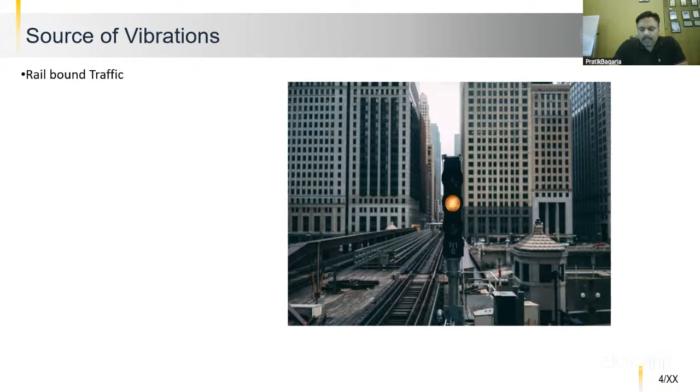So different sources of vibrations could be many, which can give any kind of trouble to buildings. Rail is a major source of vibration. I don't know how much of an impact it is in Sri Lanka particularly, but rail traffic is a big concern in many countries. We know that the metro lines, and there have been so many news articles about all of these issues, where buildings develop cracks and other issues happen to the regular life cycle of the building when there is a metro going close by.

So metro is really a troublesome thing when it comes to buildings, if the building is close by to the metro. Road traffic is also an issue. Again, there are many issues in buildings when the road traffic is very near to the building, and the vibrations can be a concern. The machineries, the giant machineries operating near the building, can be a concern. And earthquake, the elephant in the room - earthquake is always a concern.

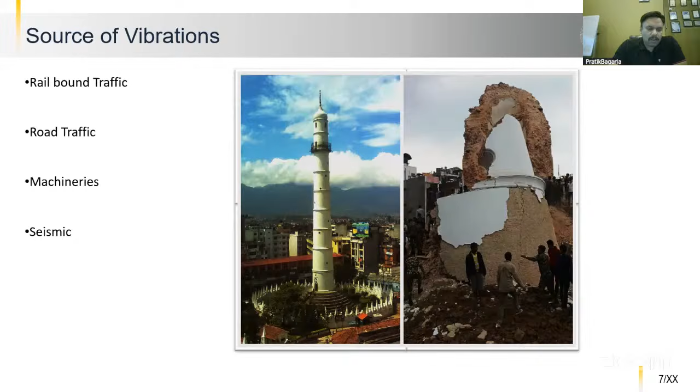You can see this picture which I have taken myself. This is the clock tower in Kathmandu. Earthquake is the major source of vibration for any structure if it is in a high earthquake zone, and we all know it already. Wind can be a very important load case to be studied, and is one of the most detrimental sources of vibration when it comes to tall buildings or long spanning structures.

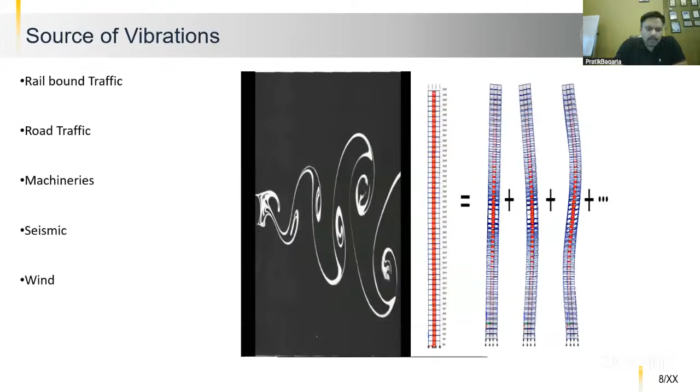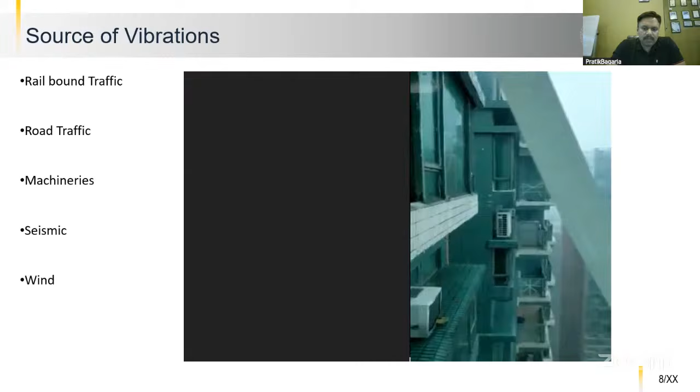There can be many issues in a building. Wind happens to be one of the important things to be studied, along with several others, and buildings can face some detrimental troubles when it comes to wind. Pedestrian traffic can be an issue for some long spanning structures, like an office floor or a bridge. All of this constitutes the different sources of vibrations when it comes to any sort of vulnerability with regards to safety of the building.

What kind of structures do we really need to study for vibrations? Not the regular residential buildings, but at least the residential buildings of some importance really need some assessment. Some big hotels - all the photographs in my presentation are our project photographs, and there can be questions around them later when we conclude. This is Hotel Sheraton in Paris, which is fully isolated by vibration isolation systems. So hotels can be one kind of building needing assessment because they house a lot of people.

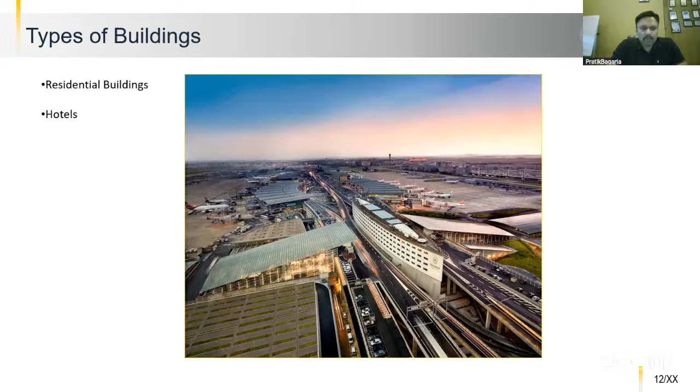Theaters, concert halls, cinemas, office buildings, hospital buildings, modern railway stations, broadcasting stations, data centers, semiconductor facilities, discotheques, or whatever - any facility or building of some importance needs some assessment, and all these different sources of vibrations we just saw need to be studied, particularly for these important buildings.

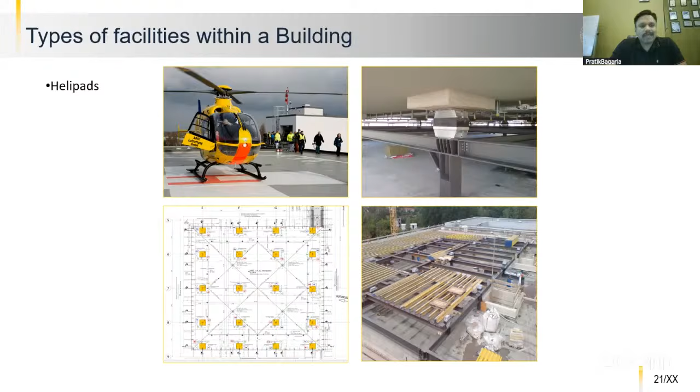There is one more structural element which needs assessment - some facilities in a building which create vibration and disturb other parts of the building. For example, helipads in buildings, swimming pools, auditoriums, banquet halls, gyms, recording studios, dance floors, acoustic rooms, data center labs, clean rooms, and biotechnological rooms inside high-end data centers and semiconductor facilities. All of these facilities are also very vulnerable to vibrations or create vibrations themselves and disturb other portions of the building.

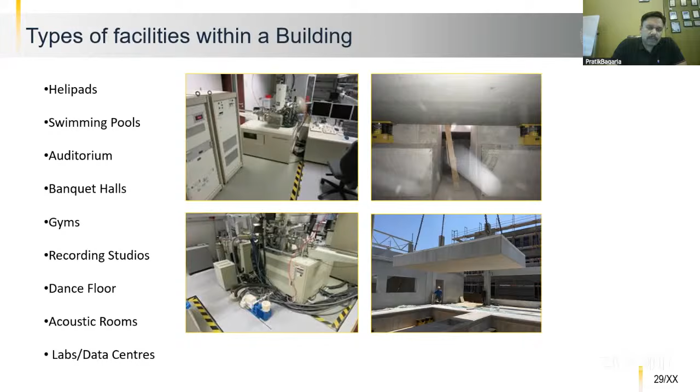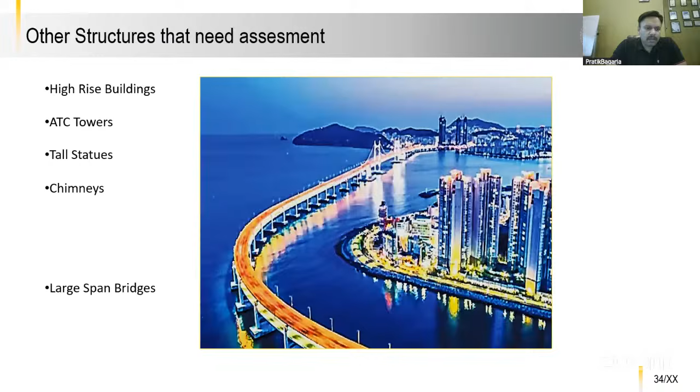These are the different facilities which need assessment within a building. Some other kinds of structures also need assessment - if it is a high-rise building, like the Dubai Frame where we put tuned mass dampers, or air traffic control towers, tall statues, plant chimneys, large and long spanning bridges, large cantilevers, and stadiums. All of these non-regular structures need assessment when it comes to study of vibrations and earthquakes.

Now coming to the main topic - what is the solution for all of this? We already noticed what different sources of vibrations can disturb, and what different kinds of buildings and structures are affected. But what are the different solutions? The first solution that comes to the mind of a structural engineer is to change the shape of the building. He talks to the architect, but more often than not, it will not be allowed and it will not happen that you completely change the building itself.

Then the structural engineer decides to increase structural stiffness by adding more and more mass, going the old conventional way, going back to the 1500s and 1600s, where you just dump mass and make the structure heavy. That's also not possible in most cases these days because of several reasons, which you already know. So what do you really do?

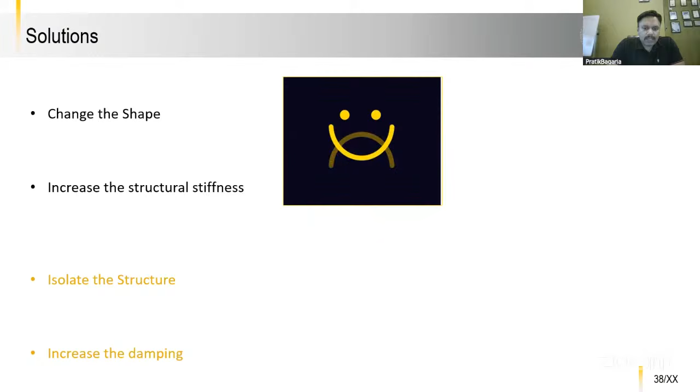Depending upon the class, size, geometry, use category of the building, and many other factors, either you isolate the building or you increase something called damping in the building. Now, to do either of this, to isolate the building or increase damping into the building...

First, you can isolate the building. Again, depending upon size, geometry type, class, importance category, occupancy category, etc., the solution will be decided, but essentially these are the solutions. The building can be isolated at the bottom, or there can be supplementary damping offered in the form of small dampers put along the height of the building.

As you can see, viscous wall dampers is option number two. Or you can put a concentrated damper at the top of the building if it happens to be a high-rise building, to control vibrations due to wind. Also, for helipads and other things, you have something called a floating floor. Or you can isolate the equipment or machines inside the building using the same concept.

So essentially, these are the things we will talk about today: isolating the building at the bottom, increasing the damping of the building throughout its height by introducing small supplementary dampers or viscous wall dampers, putting up a concentrated form of damper called a tuned mass damper at the top, and floating floors. So first we will talk about isolating the building.

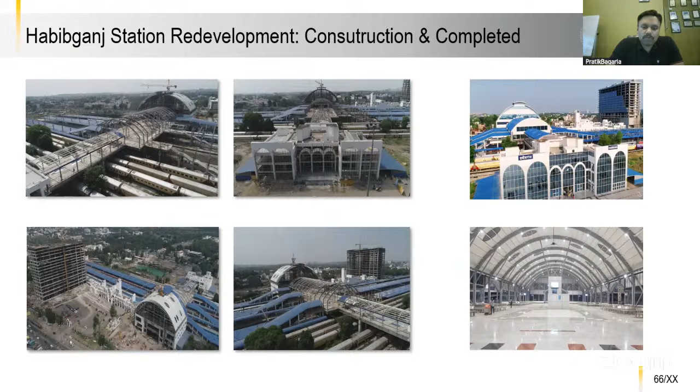It controls all the vibrations that originate from the movement of the train and go into the concourse area. Now these concourses will be used for sleeping pods, restaurants, high-end offices, etc., and you would not want any disturbance inside the concourse area. Now India is also planning to develop residential facilities over the concourse and over the railway stations, where such solutions can really prove very beneficial.

Now we talked about isolating the structure and creating this filter using two technologies. One is base control system and another is closed cell polyurethane. But depending upon, as I said, the type of the building, the use case, etc., you can also increase the damping in the building.

Now, to increase the damping in the building, you can add supplementary dampers. If you don't add a supplementary damper, you know how the seismic response of a conventional building would be - I will not go into that. But if you use a supplementary damper, this is how the seismic response of a building with a supplementary damper would look like. Once the damping of the building is increased, the base shear, displacement, drift just shift it to the corner.

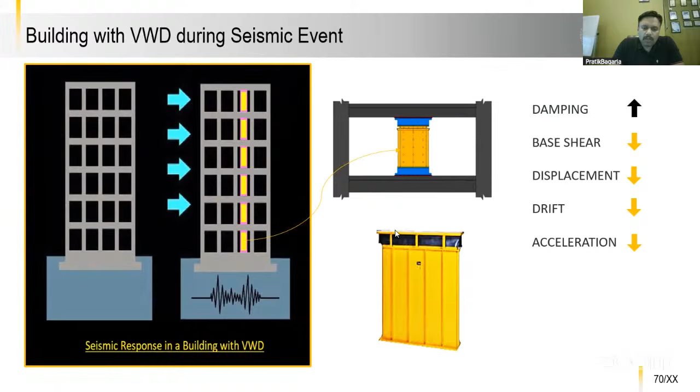Once the damping of the building is increased, the base shear, displacement, drift, acceleration, velocity - all these parameters will come down, simply because you have increased the damping. And this is something very easily correlated and established by different codes - of course Indian code, but so many other codes as well, in Eurocode, in ASCE, or in IEEE, whatever.

Why are you able to reduce the application of earthquake force by 20%? Because you are able to increase the damping from 5% to 10%, which essentially means that the building is now more resilient. The building has now more damping to be able to take into account the earthquake forces. And for that reason, the code allows us to reduce the application of the force itself at the first place.

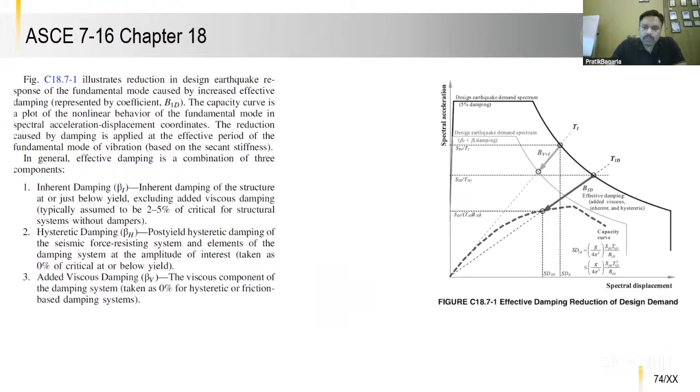These things are very clearly mentioned in all different kinds of global books or codes, whether it is ASCE or California Building Code or the UBC or the Eurocode, etc. So in FEMA also. And there are enough research papers from our office and from several other places on this particular subject.

Now, what essentially does this viscous wall damper look like, or what exactly is the viscous wall damper? If I go back, for base control system, it was a spring system with a pot damper on the side of the spring system, creating a filter for the vibration not to go inside the building. Here, the viscous wall damper acts like a resilient system which is added to the building, offering extra damping into the building.

It is a very sleek, maybe 60, 70, 80 mm thick tank. It has a bottom body, a bottom tank, as you can see in the picture, and a top plate called piston, which goes inside the tank. The black portion of the image on the right is the piston which goes inside the tank, and the tank has something called viscous mass. Now, when there is an earthquake event, the earthquake force that goes into the building gets consumed in moving the piston inside the tank, inside the damper. And since there is viscous mass, the energy that the earthquake forces generate inside the building gets consumed in moving the piston inside the tank within the viscous mass. That's how the energy dissipation occurs and the earthquake forces get absorbed.

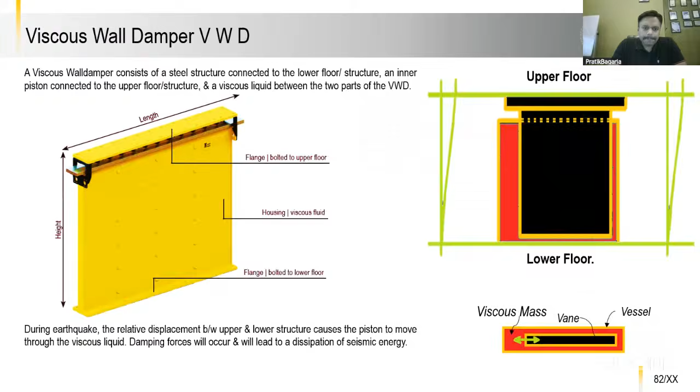To do the analysis with viscous wall dampers, you have to perform nonlinear time history analysis, and the modeling part involves the exponential Maxwell damper model, and you need to model the links, etc. You can reach out to us for any help needed to model the dampers into the building, and to do the time history analysis, or whatever is needed with regards to viscous wall dampers to be integrated into the building.

Essentially, analyzing your building with viscous wall dampers and checking its performance versus your building when there are no viscous wall dampers is not a big giant task. It is something we can do in a week's time and establish the efficacy of the dampers.

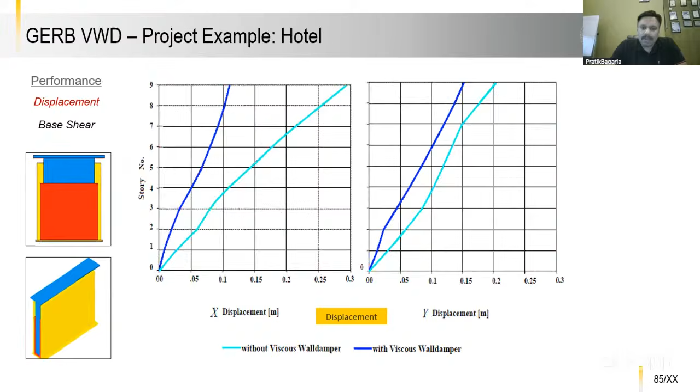This is a data center project where we did the analysis comparing the building with viscous wall dampers versus without them. This is a commercial building that was getting converted into a data center. From 5% damping, across many different nonlinear time history analyses, we could increase the damping from 5% to an average of 30%.

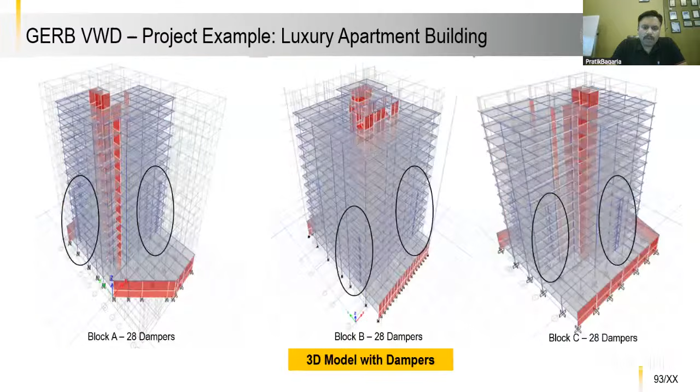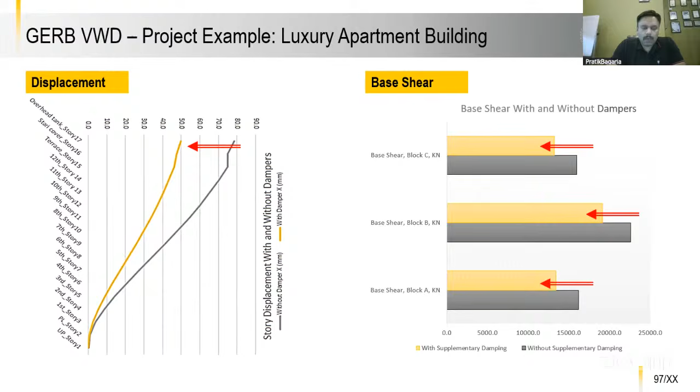This is a project of a luxury apartment cum hotel in Kathmandu, a very high seismic zone. Between the blocks, the seismic gap was to be reduced, and with viscous wall dampers, the drift displacements can be controlled. By modeling the viscous wall dampers at the appropriate locations, we could increase the damping from about 5% to about 9%, which gave good results in reducing the displacement to acceptable limits. The base shears were also reduced as an effect of it, which was not a requirement, by the way. This is just one image with one damper, but there were, I think, 84 dampers in this project, put at many locations inside the building.

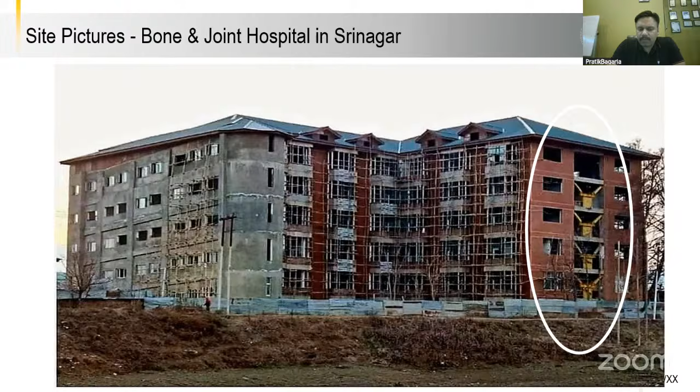This is Bone and Joint Hospital in Srinagar, where we installed many viscous wall dampers to take care of the earthquake loads. These viscous wall dampers are connected with a bracing style of connection. Usually for bigger dampers, we connect directly with some auxiliary steel at the top and bottom. If the damper is pretty small, we go with such a bracing kind of mechanism.

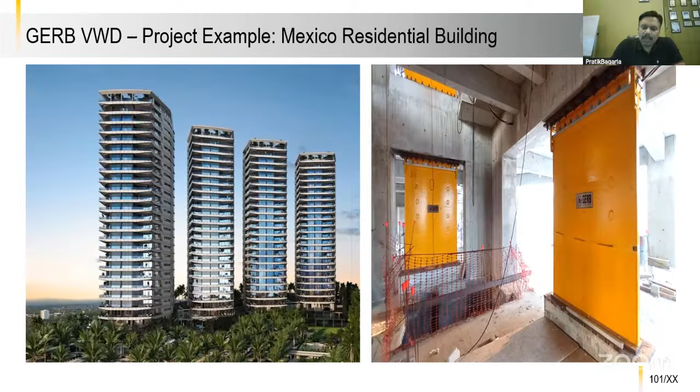This is a building project in Mexico that we recently did. Here, viscous wall dampers are put inside the building, eliminating all the shear walls, not in the periphery but within and inside the building framework. As you can see in this image, there are viscous wall dampers eliminating the shear wall locations.

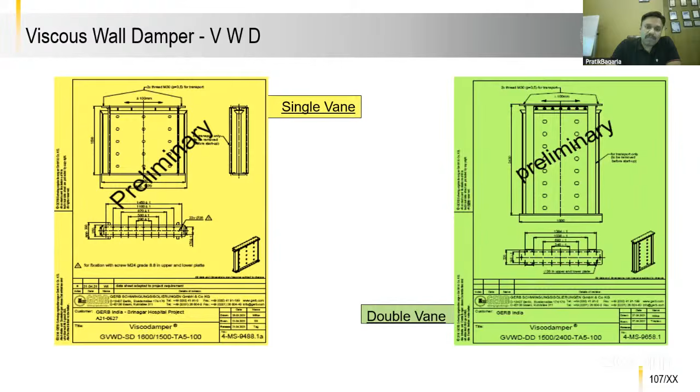The viscous wall damper can have one piston inside it, or it can have multiple pistons. More pistons generate more resistance and more damping, taking care of more earthquake forces. So we can make viscous wall dampers with a single piston, single vane, or with double or triple vanes or pistons.

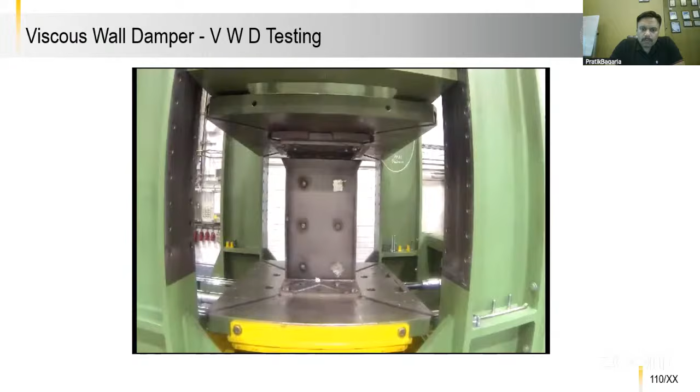This is the test setup of the viscous wall dampers. We have collaborations with many universities around the world for testing, including a university in India, in Jaipur.

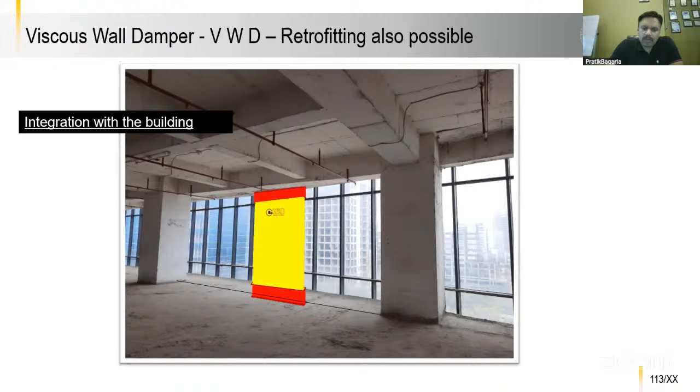So we can test the dampers if needed in India as well. For retrofitting projects, or even new projects, the dampers are supposed to be in the framed structure. The structure needs to be framed, so this is how the damper comes and gets positioned between the beams and the frame.

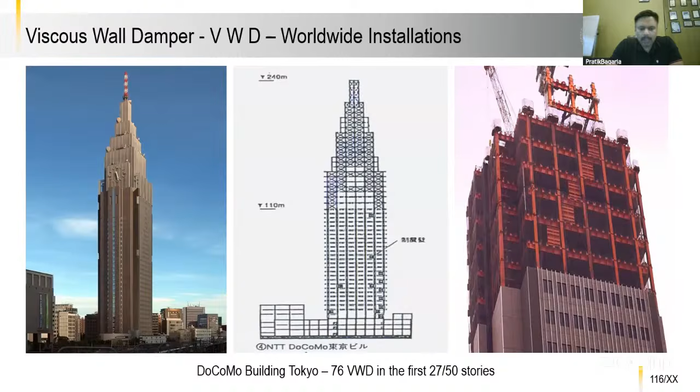There are many viscous wall damper projects around the world. It is not something very new, it has been in existence for the last 40, 50 years or so. From the US, and in Japan of course, many projects like the famous Docomo building in Tokyo, Waseda University, or other buildings in Japan. These are very old images of viscous wall dampers around the world, and if you see, this looks also very old.

Now, few merits of viscous wall dampers as a solution to help the building control earthquake forces. These are completely passive systems. There is no seal, no valve, no orifice, no possibility of any failure. These are also fix and forget systems that don't require any maintenance. You get the cost benefit in many ways, which we can figure out when we use the system.

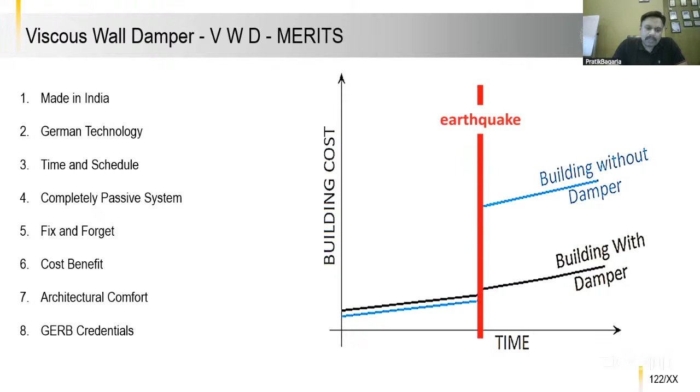So that's the benefit of having dampers in the building. If an earthquake hits, the building with dampers can really save you on major cost as well.

Now, let's go to the top of the building. If the building is quite tall, which happens to be the case worldwide, and of course in Sri Lanka also we are seeing many tall buildings coming up, tuned mass damper is the technology which can help tall buildings take care of the high vibration amplitudes that arise due to wind or earthquake.

We know that tall structures get easily excited because of high vibration amplitudes, and because of vortex shedding, buildings can vibrate in several different modes, and many modes could be vulnerable, not just the first or second mode. That's the reason for tall buildings, vibration assessment, damping assessment, wind tunnel testing and so many other activities, but damping is something which is critical.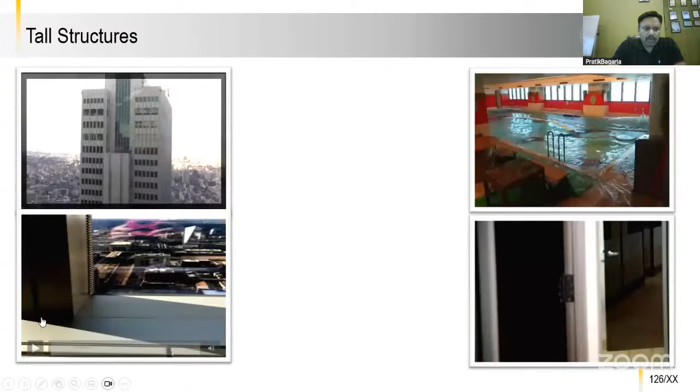So these are some examples to show you the effects of wind and earthquake in tall buildings. Whether it is the building itself, the facilities inside the building, the pool inside the building, the partition inside the building, everything goes for a toss. We know already that many buildings in China or even in the US are facing leaks, creaks, breaks, etc., and are completely unoccupied because of such issues, and are often asked to be vacated.

So again, what do you do during design? As we discussed in the very beginning, either you can change the shape and the geometry of the building, which will be very difficult, or increase the stiffness or mass of the building, which may not be economical or suitable because you really cannot change the shape and geometry again. Increasing the stiffness and mass also will be difficult.

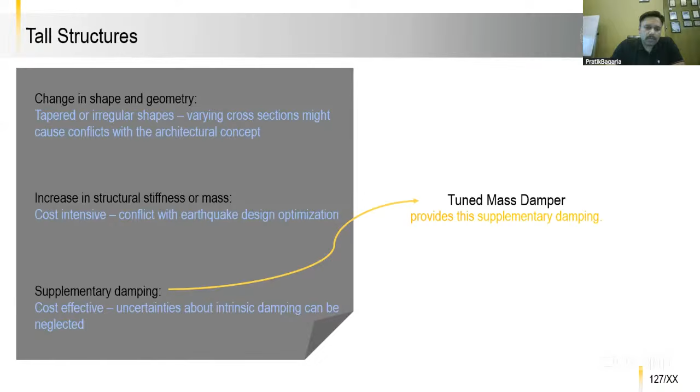So what you do is you add supplementary damping into the building by adding tuned mass dampers. I hope you already know what a tuned mass damper is, but just very briefly, it absorbs the extra kinetic energy that is getting generated into the building because of the excitations coming from wind or earthquake, and it sets itself into motion in the opposite direction. When it sets itself into motion in the opposite direction, it essentially absorbs the extra kinetic energy that is trying to disturb the building.

What really happens is when you add a tuned mass damper into the building, as the name tuned mass damper suggests - tuned mass and damper - there is a mass which is tuned to the frequency of the most vulnerable mode of the building, meaning it has a similar or near same frequency as the most vulnerable mode of the building. And that's why it is able to absorb the energy and sets itself into motion out of phase to the structure, reducing the amplitude substantially.

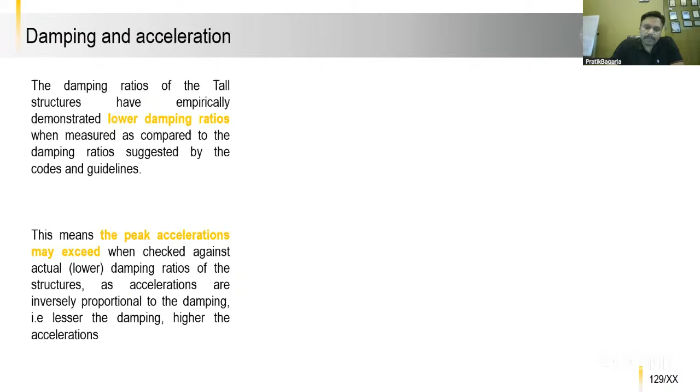So if you see, the damping is not even 2%, which you have been assuming in your calculations. So what really happens if the damping is not 2%? This happens.

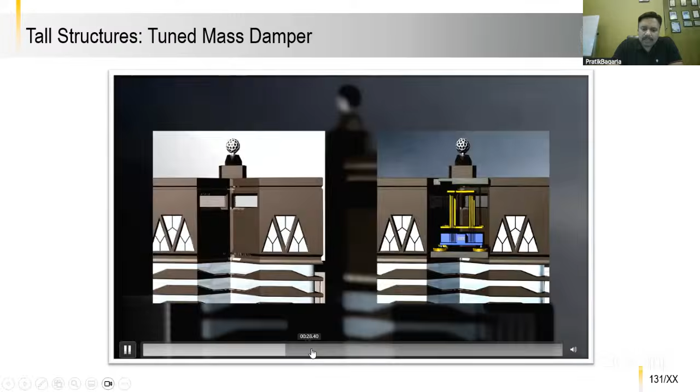This is one animation video where you can see a building vibrating with absolutely no assistance of an external damper versus a building which has a TMD. If you carefully see, on the left the building is going left; on the right the damper was moving opposite. So the damper moves opposite to the motion of the building, and this is how a damper operates — the mass swings or moves in the opposite direction and controls oscillations through dampers.

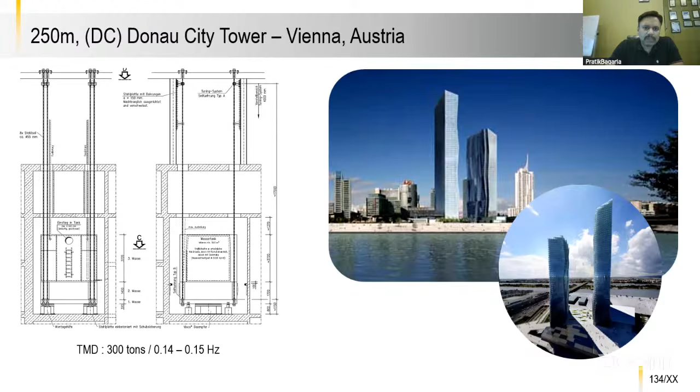Again, many such examples: this is DC Tower in Vienna, with 300 tons of tuned mass dampers right at the top of the building. This is the very famous hotel Burj Al Arab in Dubai. As I said at the beginning of the tuned mass damper portion, several modes can be vulnerable in a building, not just mode 1 or 2. Here, the exoskeleton of the building has many tuned mass dampers — 11 of them — taking care of different modes of the building.

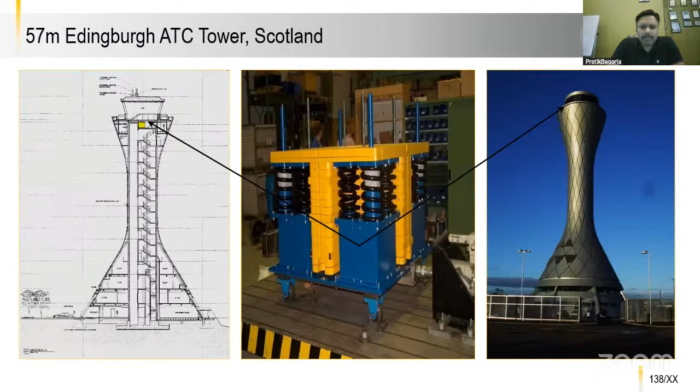The tuning element need not always be pendulum ropes — it can be springs, rail systems, etc. This is one example where pendulum ropes are not used, but spring systems were used instead. The dead mass of the damper can be formed in any shape or size. This is a ring-type tuned mass damper inside the Bay Bridge Tower in China. This is a simple pendulum tuned mass damper in the ATC Tower in Scotland. This is a double pendulum tuned mass damper to take care of two different frequencies at once, inside the hotel in the 318-meter Aspire Tower in Doha.

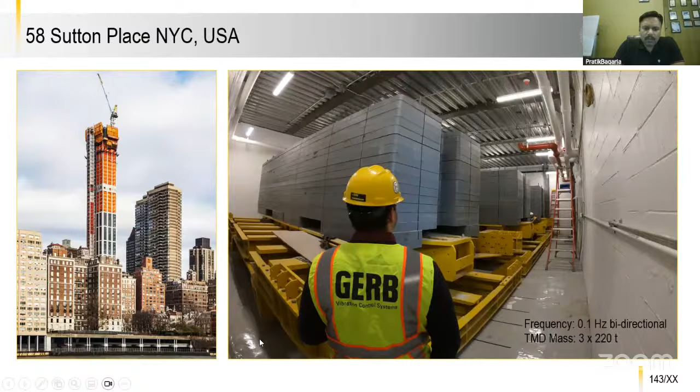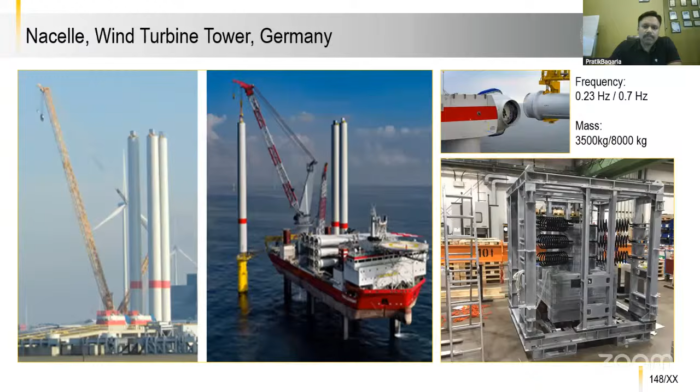That's how simple it could be sometimes.

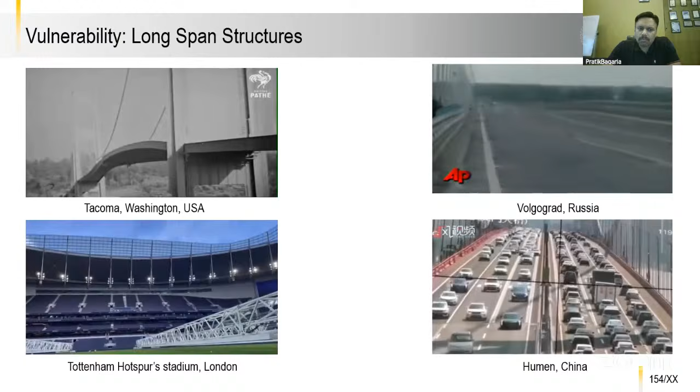Tune mass dampers, as I said in the beginning, are also used for long spanning bridges. These are famous bridge examples where vibration was a real problem. The Tacoma Bridge, Washington, opened only a few months ago, was built at a cost of over $6 million, but misfortune overtakes the great structure. These are some of the most amazing pictures ever recorded by a newsreel - the actual collapse of the world's third largest suspension bridge.

These are quite famous, and we all know that a bridge, because of the vortex shedding effect, can be vulnerable to high amplitudes, and also because of pedestrian traffic. Bridges, or long spanning structures, are usually very vulnerable.

This is how the tune mass damper looks for long spanning structures. The one difference is that the motion of the damper is up and down, as against tall structures where the tune mass damper moves left and right. In this animation, understand how the damper works - above, the bridge is stable, silent, stagnant, and the bottom bridge is levitating.

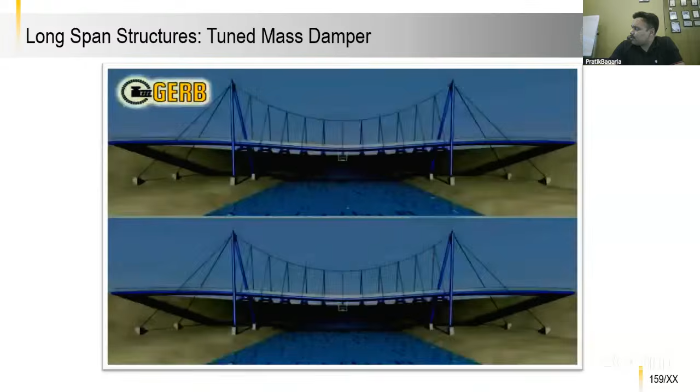This is the tune mass damper, which helps keep the bridge's motion in check. Because of the excitation that the damper receives from the bridge itself, it sets itself into motion up and down, and that's how it controls the overall oscillation of the bridge, bringing it to rest. So this is how a tune mass damper works for a long spanning bridge.

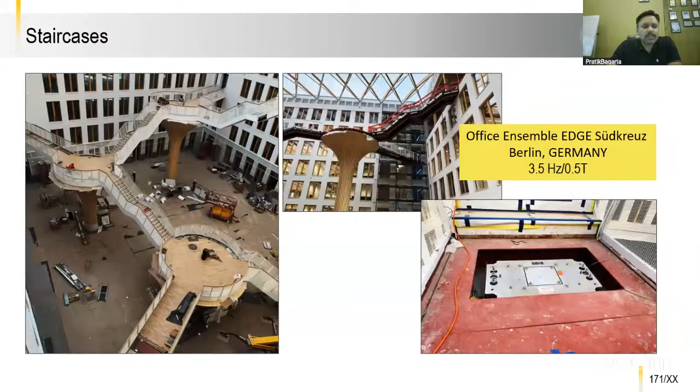All these kinds of long spanning structures can have issues with regards to vibrations and serviceability, comfort issues, etc. Tune mass dampers can really help stadiums as well. And bridge pylons are again an example of tall structures.

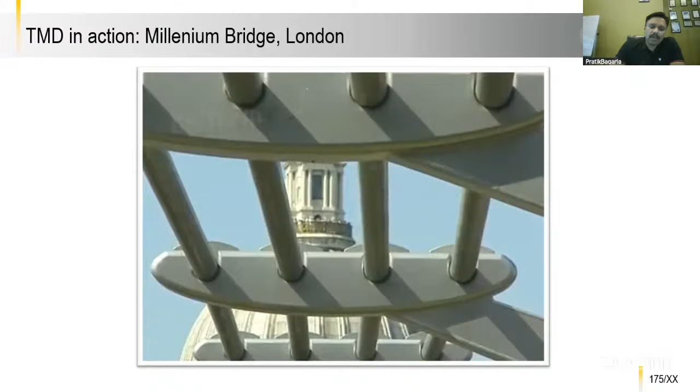This is the Millennium Bridge - the day it was launched, it was closed for public the same day because it was vibrating a lot. It was closed for a good amount of time, many months - in fact, it was closed for 2 years. We were approached to design a solution for this bridge, and tune mass dampers were designed. After implementation of the tune mass dampers, it was reopened to the general public. It is quite remarkable and famous in many ways.

Floating floors is a new topic that caters to everything inside the building - any floor, any portion, such as helipads, swimming pools, clean rooms, data center labs, acoustic rooms, gyms, dance studios, banquet halls, auditoriums, clubs, etc. All of these create a lot of vibrations and disturb other parts of the building. So what you can do is use a steel spring system or a Novodamp system.

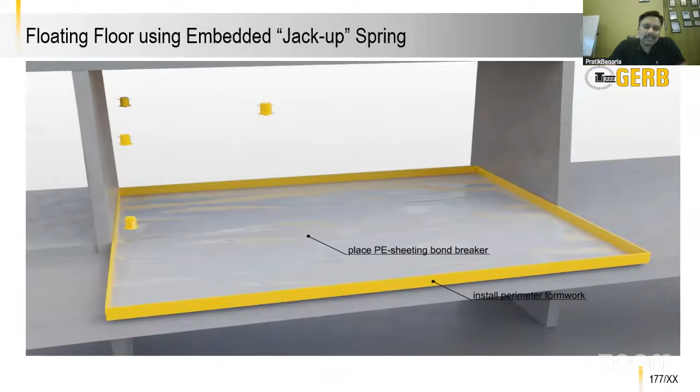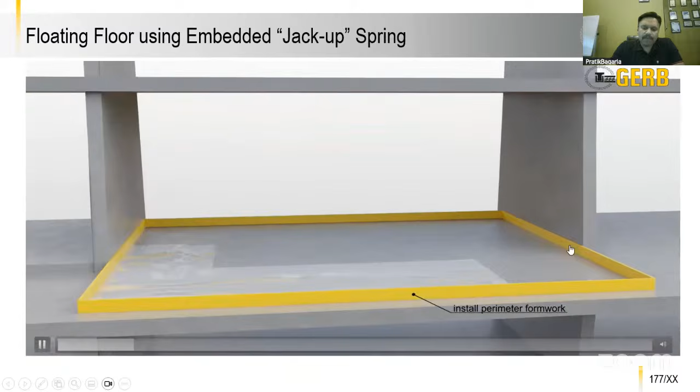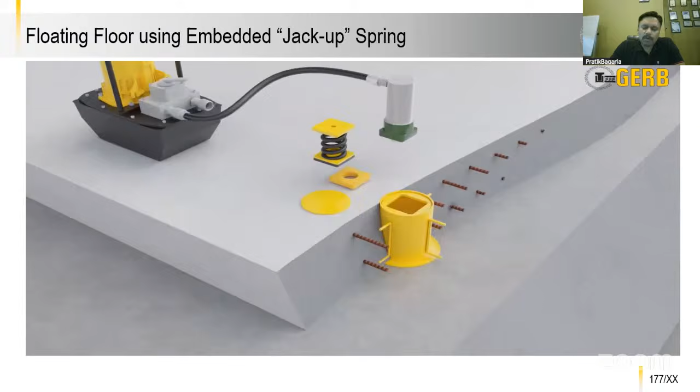I will show you both, and I will directly show you how this system is implemented, so that you understand the concept of floating floor and how you can divide the vibrating floor from your main structure. You essentially lay a layer of plastic film or polythene sheet after installing the perimeter strip, then lay the steel housings, which at this point have no springs, lay the new reinforcement, and pour the concrete over it. Then you put the springs inside the housing, as you can see in the video. After the springs are inserted in all the identified locations, you jack it up. You jack the spring up and jack the overall floor up.

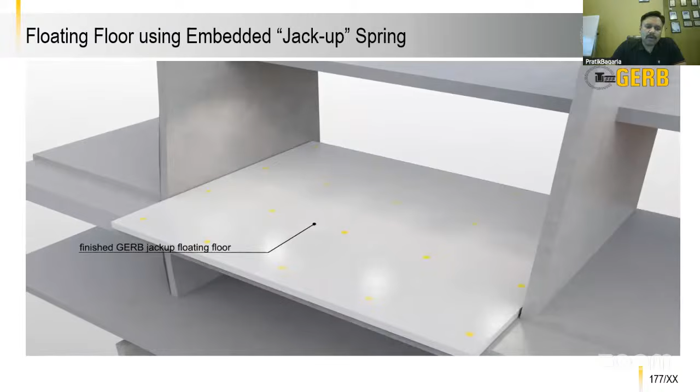That's how you create some airspace between the floating floor and the mother floor. With this concept, you can create a floating floor which can vibrate, and the vibrations will not percolate down. That's the idea of using steel spring systems for a floating floor.

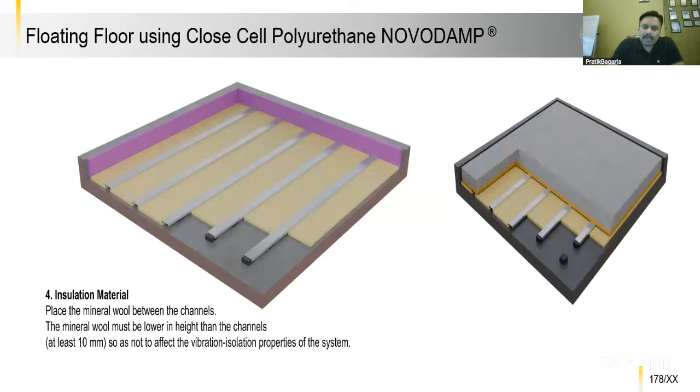In a similar way, though the execution is slightly simpler, you can also use closed cell polyurethane, the NOVODAMP, but here you need not jack it up. Just lay the Novodamp system, put the sacrificial shuttering or metal bars, ply boards, or cementitious boards, and then lay the new concrete over it. There are many simpler ways to make floating floors. This is one of them, but there are many other very simplistic ways using polymer systems as well.

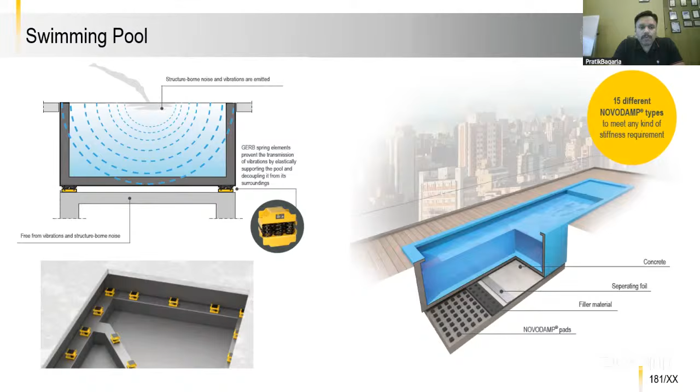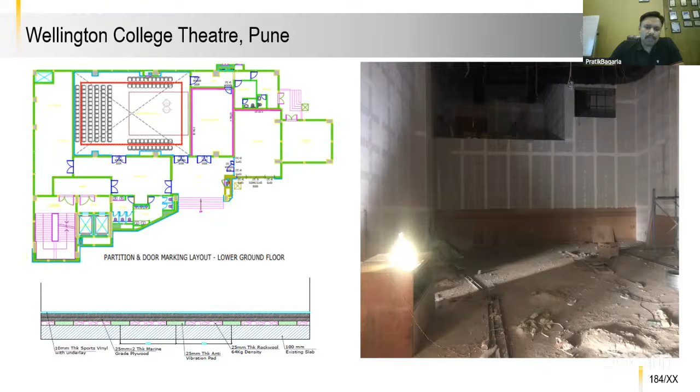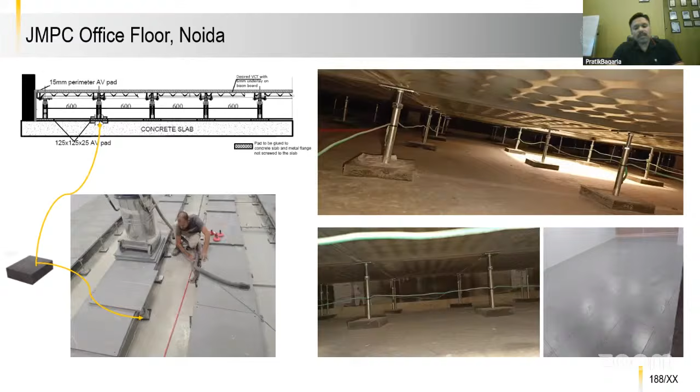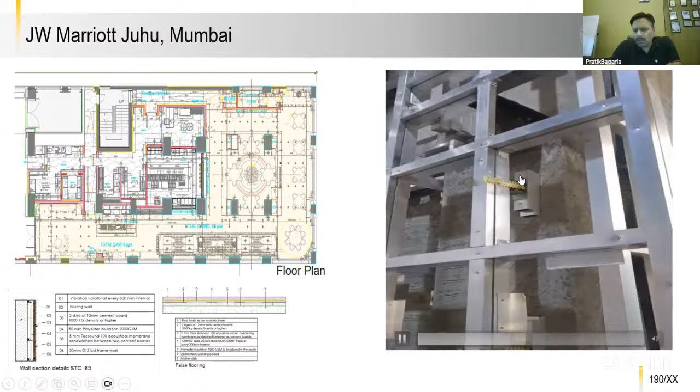Now this was all for buildings and structures. Now a little bit about isolating machines. We know why it's important to isolate machines - it's not just for the machine itself, but also to reduce several effects of vibrations which can disturb occupants in the building. Primarily it's for protecting the machine and its foundation, to reduce structure-borne noise, to increase the performance of the machine, to reduce downtime, etc. But there are many other benefits of isolating the machine.

Now what essentially is the principle of vibration isolation when it comes to machines? The machine transmits some force - it has some sort of exciting force. If you have an isolator underneath the machine, the isolator will absorb all the dynamic forces and the exciting force, and the transmitted force will be nullified. You will not get any transmitted force. So if you see it in the graph, the exciting force has a curve with some magnitude and value, but in the transmitted force graph, it's quite a flat line.

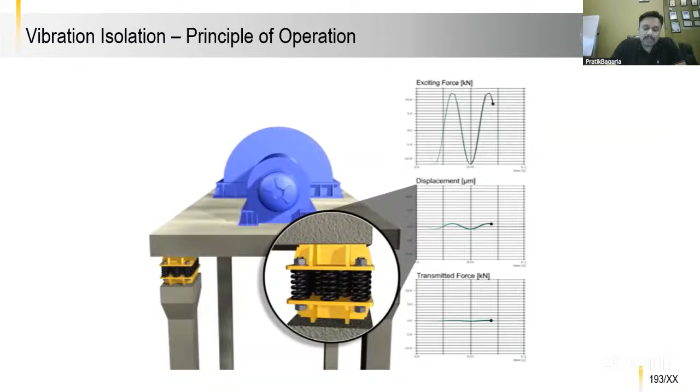All that is generated at the level of the machine is not transmitted down; it is all absorbed by the isolator. So sometimes I say that for a dynamic system, you need a dynamic foundation - that's what we know as civil and structural engineers. But with an isolator, you can have a static foundation for a dynamic equipment, because the isolator takes care of your dynamic requirements, and you can design your foundation just like a static foundation. So all different kinds of machines - boilers, pumps, compressors, generators, cooling towers, whatever - can be isolated within a facility.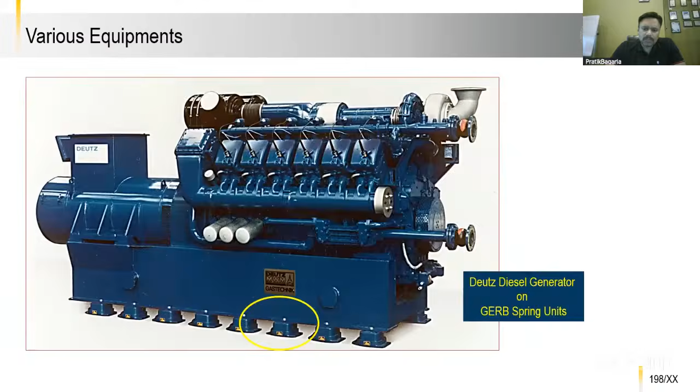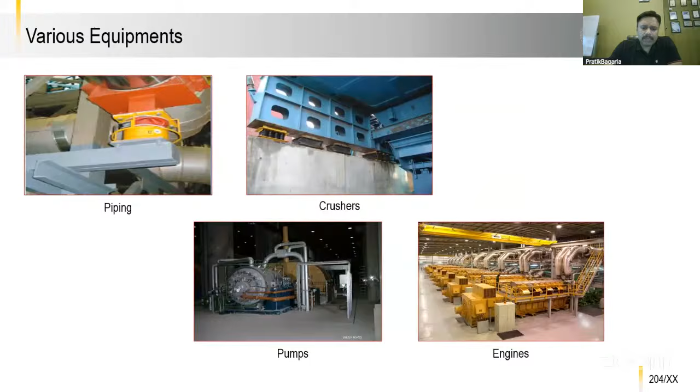Some examples to show you how the isolators look, how they are positioned for blowers and pumps, for generators. These are done quite a lot these days, I'm sure here in Sri Lanka as well. The hotel where I'm staying, I saw the cooling tower put on spring systems. The similar mechanism applies for all equipment, whether large fans, diesel engines, or larger generators - whether multiple isolating levels or single isolating level - all can be achieved in gas engines, fans, blowers, pumps, crushers, piping systems, engines, presses, printing presses, or whatever. Any dynamic equipment inside a facility should be isolated if at all it is to be.

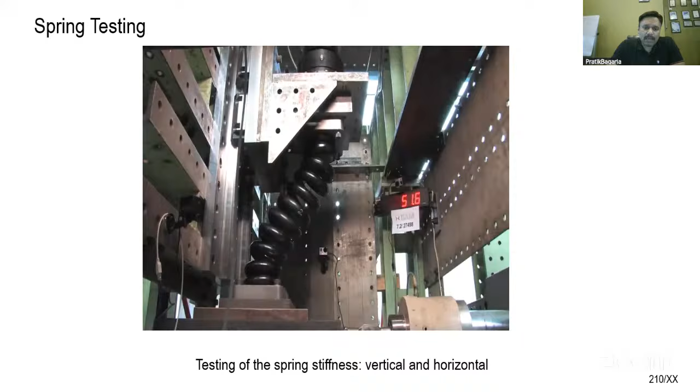If you see how this spring really moves, which may be of interest to some of you - the spring literally can compress fully without achieving any blocking condition, simultaneously goes in the translational direction fully, and then comes back to its own regular position. That's the beauty of steel helical springs.

These days, data centers, semiconductor facilities, and high-end biotechnological facilities require something called VC levels to be met. I don't know if this is the case in Sri Lanka as well, but many such cases are coming up around the world where such facilities, because of their precision equipment and high-end devices installed on the lab floor - for example quantum systems - need the VC levels to be complied with. VC levels are different vibration levels classified in terms of velocity, and these levels represent very low, minute levels of vibration. For that, you need a filter - a spring system of a certain frequency that will take care of such vibrations and filter them out so that your system remains VC compliant.

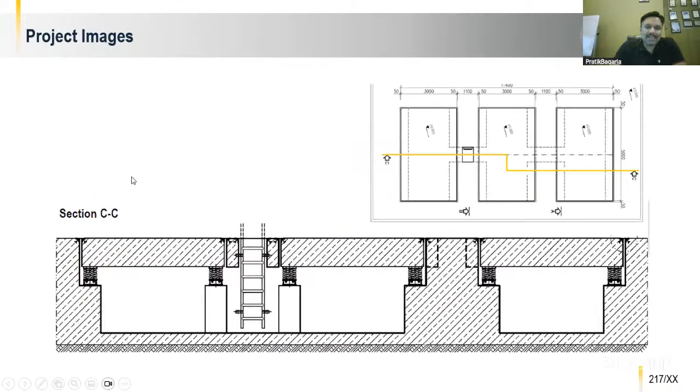These are again some installation images for you to understand how the system looks when it comes to complying with VC levels in such projects of semiconductors, data centers, etc.

So that's all from the technical side from my end. A little bit about GERB. It is globally present, about 120 years old now, and we have 5 state-of-the-art manufacturing facilities around the world. One happens to be very close to you, in Bangalore, India, just a 1 hour flight from here. The 4 other facilities are in Germany, China, Brazil, and France.

So these are our manufacturing facilities, and we are capable of not just supplying vibration isolators, but any kind of intervention you need with regards to engineering, R&D, vibration assessment, etc. We can help. When it comes to installation and mounting of the system, we also provide installation supervision or installation in general for all our devices, apart from supplying, engineering, manufacturing, etc. So installation is also something that is taken care of.

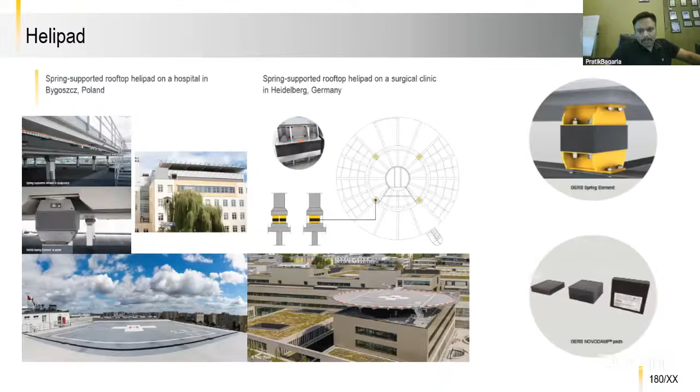Yeah, the question we had was, we were just discussing, you had a graph of the height versus damping. Yes, I think that's based on Tamura's work. That's something that has really some debate as well, where we say sometimes the displacement of a building increases, we say the damping could change. Yes, it increases. At the same time, Tamura's work is showing it's going down.

So is any work being done to measure that graph? Yes, based on Tamura's work. But is any work being done on that measurement? Yes, in fact, I myself have measured a building. In fact, couple of buildings, some 4 or 5 buildings.

But the one which was really dangerous was in Gurgaon. I will, of course, not take the name of the building, but it happens to be of one of the most, probably the most powerful man in the world. So you can guess the name. But yeah, that building in Gurgaon, when I measured, we registered a damping of about 1.1%. And the assumed damping for wind tunnel and for the analytical calculations was 2%.

Now, why did we do the measurement at all? Because we were invited to check what was really happening. And what was happening was the building was swaying left, right, front, and back. It was swaying very badly. Why was it swaying? Because actually in the building, the damping was not 2%, but much less, 1.1%, which had shot up the acceleration multiple fold.

That's what I learned from Bill Melbourne, which I wrote. But Tamura's work is showing clearly it's going down. This one, yes, I may ask the question again. I don't know, this is showing that the height increases. That's what we're just discussing.

Damping reduces. It's Tamura's measured, I know. It is something which is registered. It's not about if the height is increasing, the damping is reduced. My understanding is this, Professor Mendes, that the graph is not about if the height is increasing, the damping is reduced. This graph is to essentially ascertain that damping is not always what you have assumed.

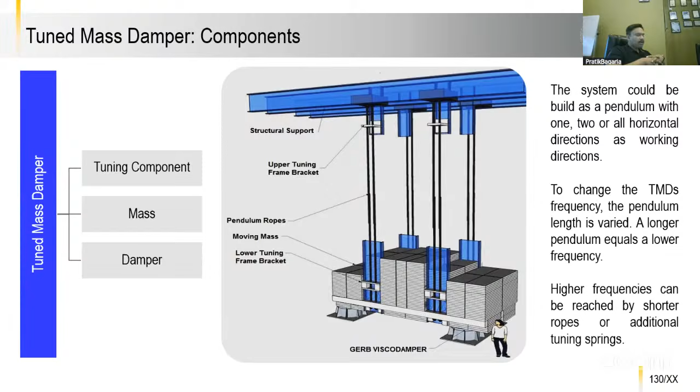So we put the bolts, but it is not needed. But the hole between - you don't have the hole between. No, in some photographs, if you have seen the bolts, that is transportation bolt, which are essentially removed after the installation is completed. Today you are showing mostly the other way around - you are isolating the machines from the floor. So earthquake isolation is the other way around, isolating the floor from the earthquake, from foundations.

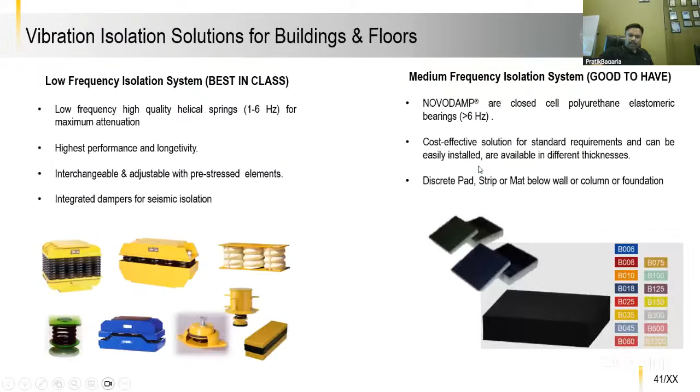Bring it up, yeah, it's pre-stressed, so you release it later. But these bolts that you're seeing here, maybe I'll have some photographs in which there are no bolts. Like you see here, there are bolts, right? But if you see here, there are no bolts.

So bolts are optional. If we want some extra comfort, we can put the bolts. But if you're using bolts, the force flow path will be through the bolts, because they come into the critical path. If you're not putting bolts, the resilient pads will take care of the forces.

What is this made out of? Resilient pads are made of a composition of material which is essentially bitumen and silicon, with some perforated layers. When the load comes, it is otherwise sitting idle in ambient conditions, but when load is applied, because of the heat, this composition flows out of the perforated layer and makes a bond between the isolator and the concrete.

These pads complete the goal by themselves, that's all there is to it. These pads will not be exposed outside the plane of the isolator, since they stay within its periphery. You will not be able to see the pads - only the edges might be visible to someone, but essentially nothing is exposed.

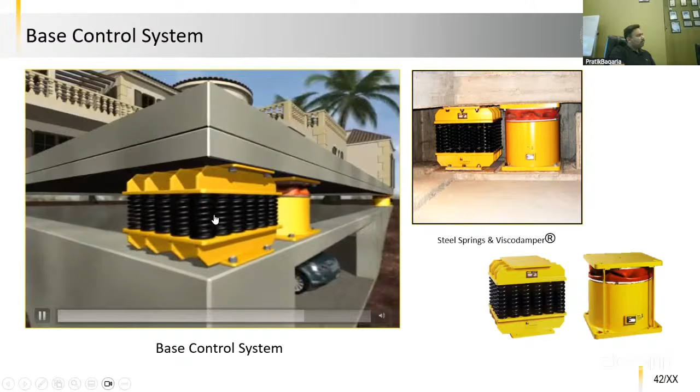Base isolation is usually done for buildings governed by earthquake load cases or by load cases of vibrations coming from outside. But if it is wind, primarily the wind load case will not govern these kinds of buildings. If it is a tall building, you would not go for base isolation, but for a tuned mass damper - especially in places like Myanmar, where there is cyclone and earthquake at the same time.

Tuned mass damper actually caters to a particular frequency. Now for earthquake, it's a bit of a challenge if you're catering only to one frequency and trying to say with full confidence that you'll be mitigating the earthquake. That's a challenge. So it's primarily done for wind, though at the same time it can be tuned to take care of earthquake for certain frequencies - let me put it this way.

Taipei 101 - is it by this section? Taipei 101 has a big mass on top which is a tuned mass damper. Recently, when there was an earthquake, many people started congratulating on LinkedIn saying the damper protected the structure from earthquake, etc. But this is not true - it is for wind, not earthquake. It happened that the frequency of the earthquake nearly matched the frequency of the damper, and it happened to help. It was just a coincidence, and it is not designed for earthquake.

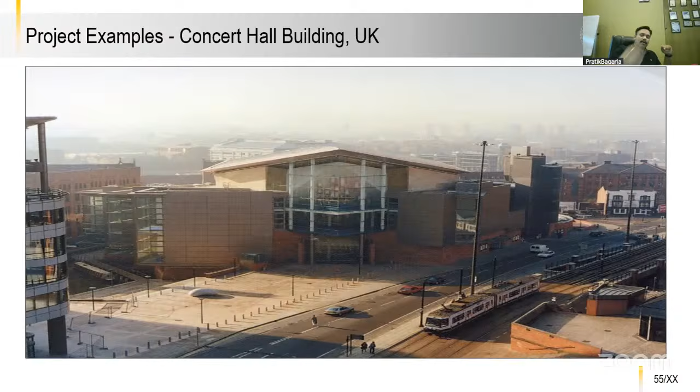Yes. Yeah. In power barges, you mean?

One more aspect to durability, as Professor Mendes mentioned, marine environments. In marine settings you just need a different kind of coating on the isolators, which we have done, and we've given a 100-year guarantee for some bridges where the dampers are placed in very toxic, high-salt marine environments.

Nothing happens to them. In marine projects, large ships called power barges house captive or small power plants. The ship floats while generating energy, and these power barges contain a lot of different equipment, whether it's a stack, turbine, generator, engines, pumps, motors, fans, or blowers. All of this becomes very susceptible and vulnerable to vibrations because waves and high and low tides create sudden levels of acceleration beyond the allowable limits of the machine. So you can put in isolators and treat these vibrations just like earthquakes in your analysis, controlling and reducing the vibrations, filtering out their energy using these isolator and damper systems. Simple.

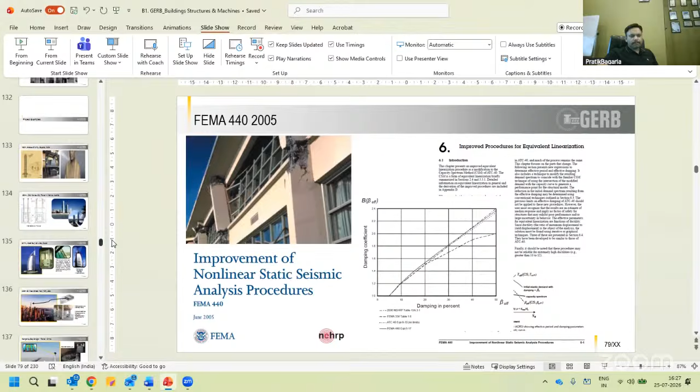Like floor vibrations or bridge vibrations, sometimes for a tuned mass damper you need some connection because you want to hang the tuned mass damper through a frame, and that frame essentially needs to be connected to the building to become sort of monolithic with the building, for tuned mass dampers.

For base isolation, you don't need to have a bolting connection. You have a connection in a different way. For a viscous wall damper, again, you need to connect the damper from the beam, bottom of the top beam and top of the bottom beam.

There's one more question regarding the seismic isolators. Are there any common failure modes associated with these isolators? Since we are sitting in Colombo, I think that's Muttiah Muralitharan's question - a doosra kind of question. I don't know what is the failure mode of my isolator, you know? I mean, there is no failure mode as such, but the isolators are good enough to take care of the loads in all the ways.

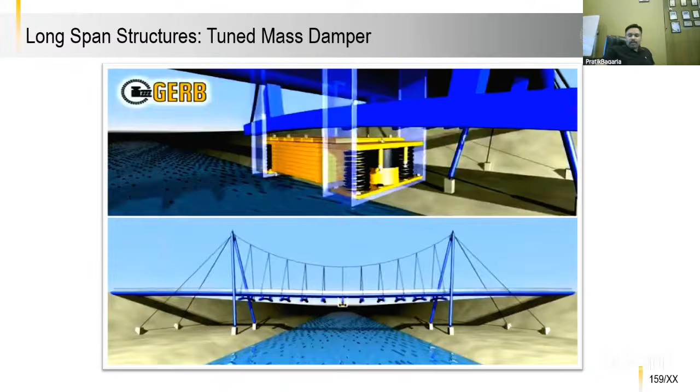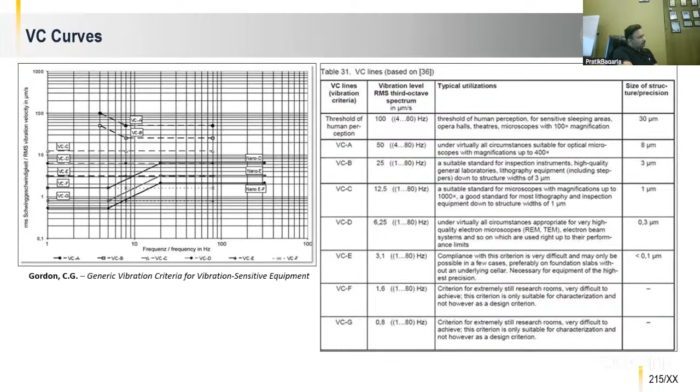Maybe an alien topic for students - it will be.

I tried to make it a little bit video oriented, picture oriented, but I'm sure anybody cannot make it as interesting as a game of cricket between India and Sri Lanka. But yeah, that was maybe when I was a kid. I remember, in fact, I can list down all the 11 players of Sri Lanka when I was a kid, and I used to watch cricket. All the 11 players I can mention right now. In India, the Sri Lankan cricket team and West Indian cricket team are liked a lot. People like them a lot.